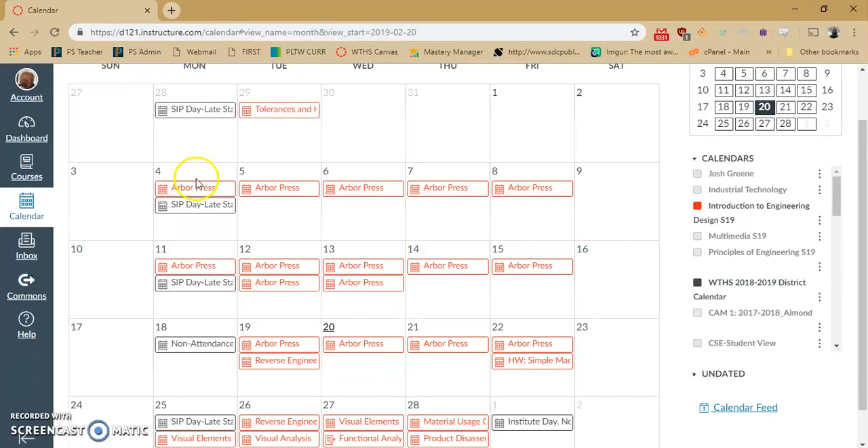The very first thing you want to do is go to the Canvas calendar, and in February there is the Arbor press template that is on the 4th. Click that, download that drawing, and place it into your U drive where you have your folder with your Arbor press.

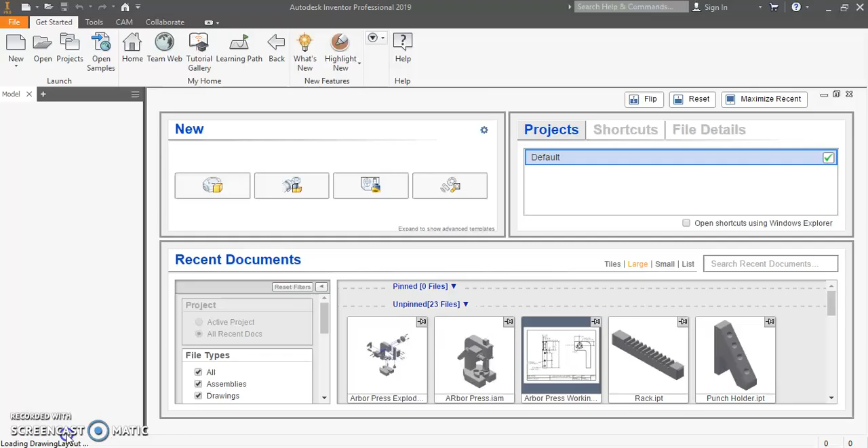Once you've downloaded it, you can open up that document, and it will eventually open in Inventor. If we take a quick look at it, it has name, file name on the left, date, material, scale, volume, and your period.

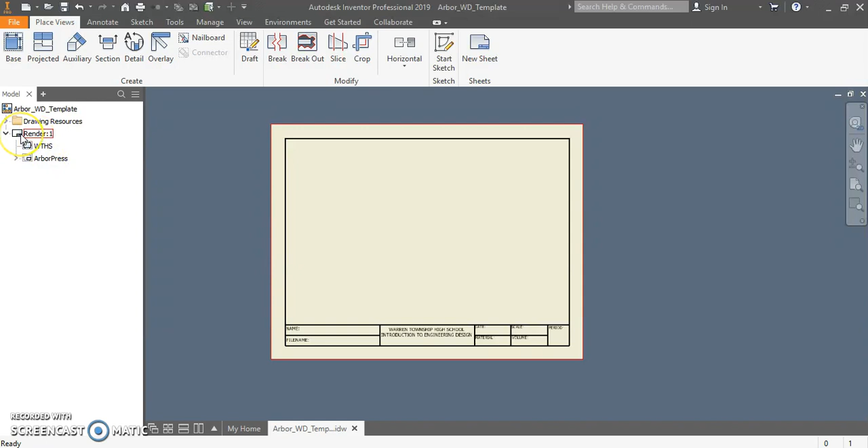Next, we're going to create a bunch of sheets. The first sheet is going to be our rendered view, so I'm going to slow click twice on the name and change that to render. I'm just going to create all my sheets first, so I'll click New Sheet. I'll come back and fill in the period and scale later. Now I'll slow double click on this one, and this is going to be the exploded view.

Create another sheet, again I'm going to put these in later. Because the exploded view is so large, we're going to put a parts list on another page. After the parts list, we are going to have the column. If the slow click isn't working for you, you can always right click and edit the sheet, and change the name there.

So we have column. We are actually going to need 2 columns, so I'm just going to call this column 2. We need 2 for that.

After that, we're going to create another sheet, and this is going to be the gear plate, and the cover plate. This is what we'll start with, our different pictures, and then we're going to start putting things in one by one.

So for the exploded view, again, we've seen how to do this from the automata, but this will be quick. I've gone to the exploded view, I'm going to bring in the base, and I'm going to bring in the exploded view.

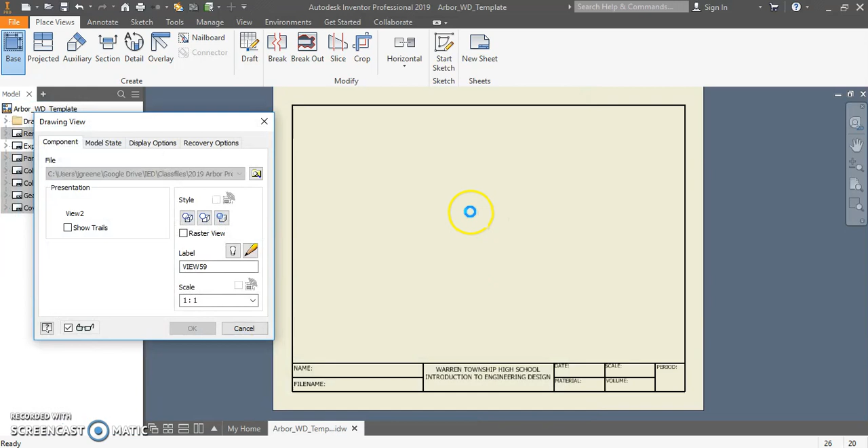And this is the position. I'm following the position from the drawing template, and I'm just going to change the scale here till I get something that I think is appropriately sized.

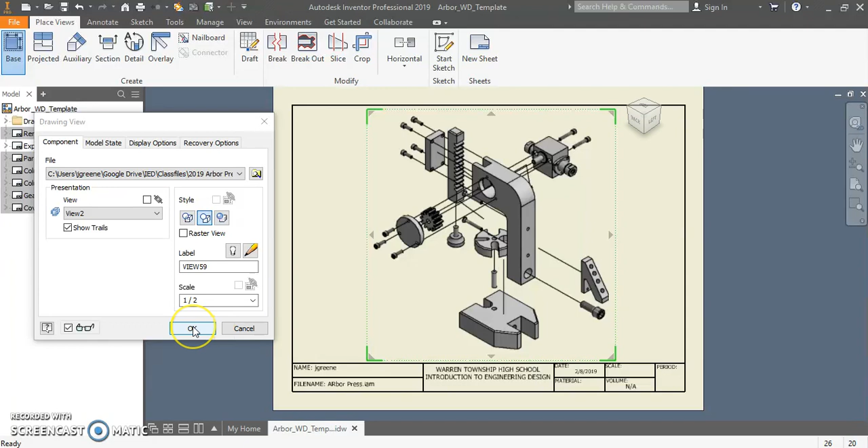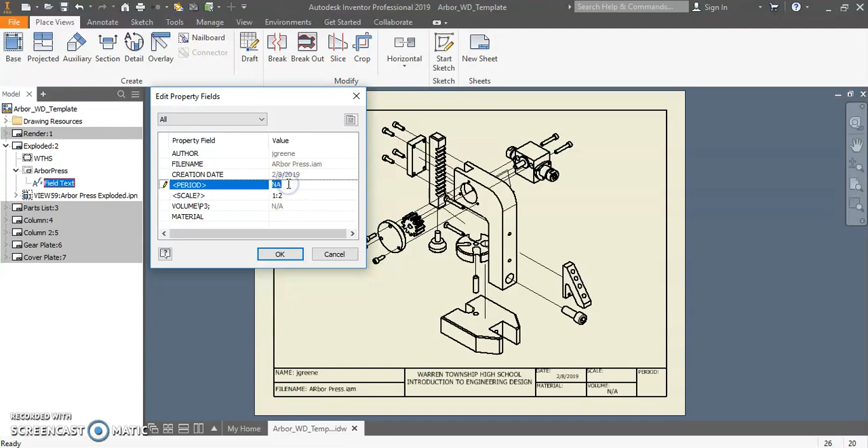Okay, it was 1 to 2, so now I can go in and edit the field text. The scale is going to be 1 to 3, or it's actually 1 to 2, I believe. And the period, that's going to be your period you're in, and this one's not going to have a material show up because there's a couple different pieces of material here.

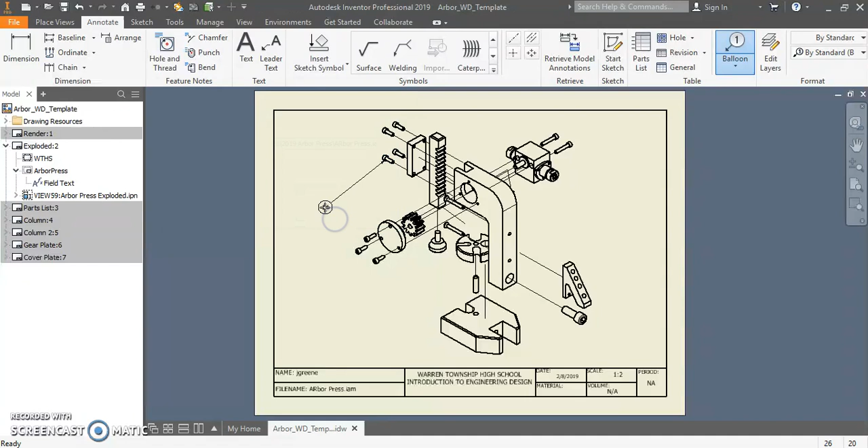You're going to go through and balloon this all out. Again, the ballooning should look like this under Annotate, Balloon, and the first time you select something, it's just going to make sure you have the correct BOM structure, and then you're going to put in your balloons. So for item 14, I only need to do it once because there's a bunch of these socket head cap screws that are all the same. Again, just go through and balloon each one out. I won't go through that right now.

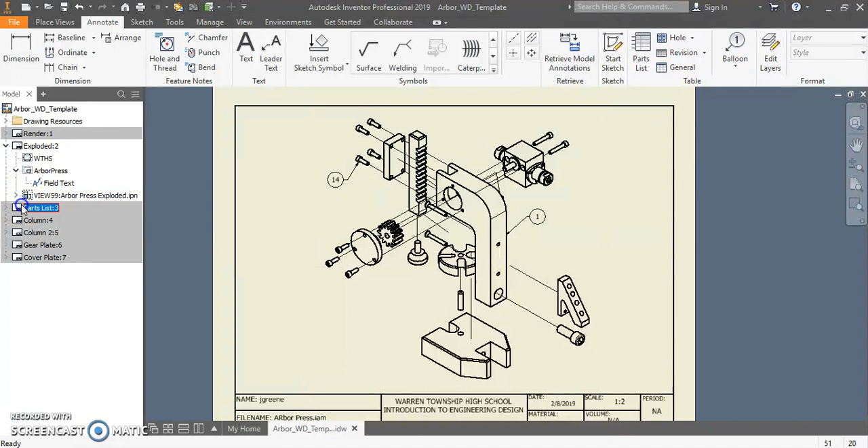Under parts lists, we're going to create a parts list, and it says select document. Well, I can't select a view because I don't see anything, so instead I'm going to select that exploded view, and I'm going to hit OK, and put that right in the middle of the page, and make some changes to it.

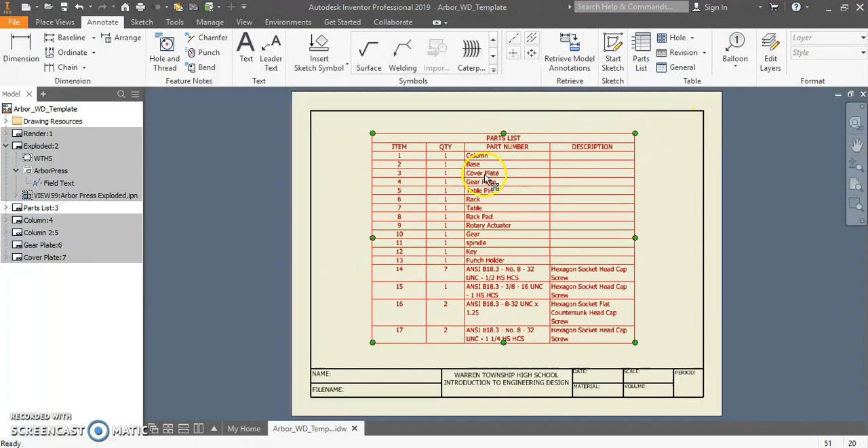So I'm going to right click and edit the parts list. I'm going to select column chooser. I'm going to get rid of description, and add in material, and add in volume. I'm going to select OK.

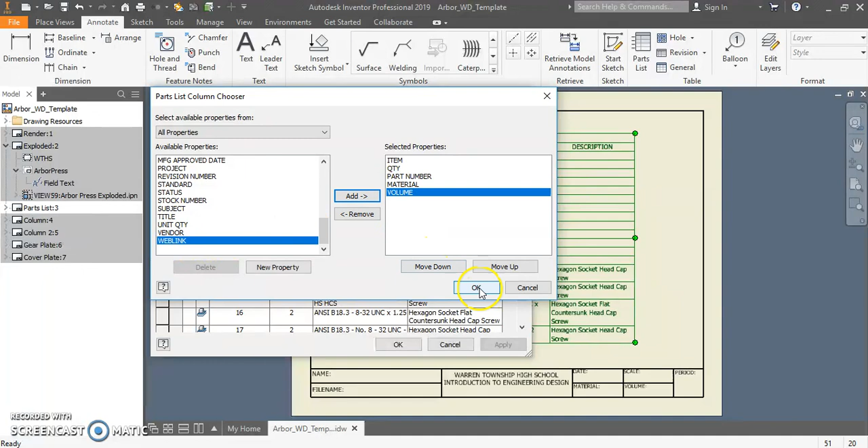Looks through, everything looks good. I'm going to go ahead and hit OK. I'm going to size this now to try to fit my page as best as I can.

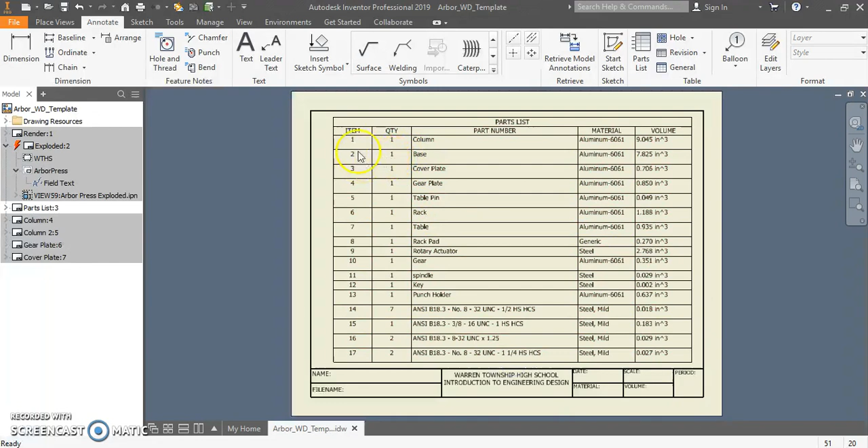The item and quantity can actually be pretty small, and then I can use that to continue resizing what I have. It takes a little bit of effort, but if you just move the item quantity over and make it bigger, then everything should fit.

This is a good way to check right now as I go through this. You can see that the rack pad is currently a generic material, so that's something I'll have to go back and change. You want to make sure it's aluminum or steel based on the drawing.

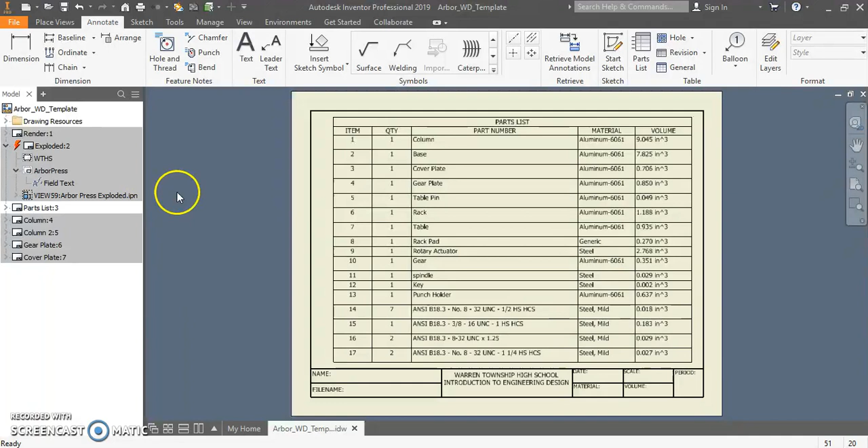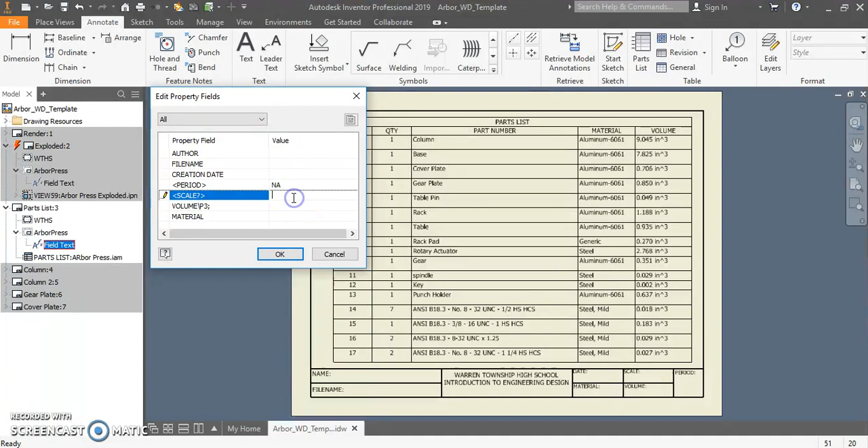Now for the parts list, I can also edit the field text, and the period again will be your period. There is no scale on this, and everything else is just brought in. If we have time, we might get to this. Alright, moving on.

The one thing we haven't done yet is the render, but there are videos on that. Let's go to the column.

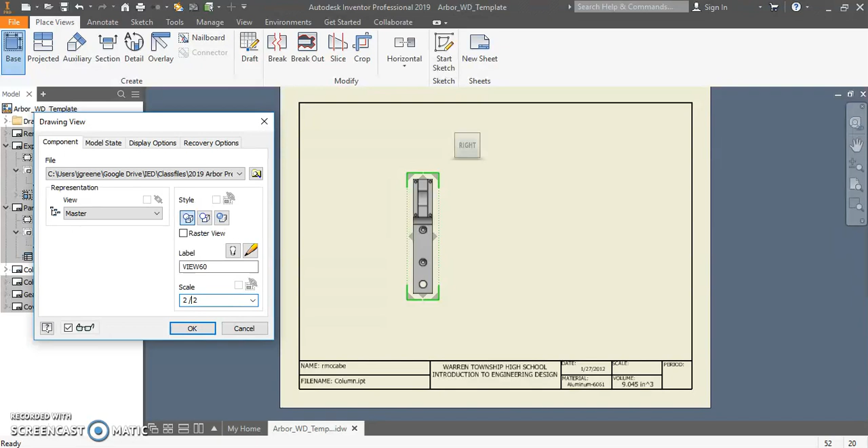For the column, we're going to set it up in 2 pages that we want to see. So our first one for the column is going to be this view. And for the scale, what I found fits is going to be a 2:3 scale.

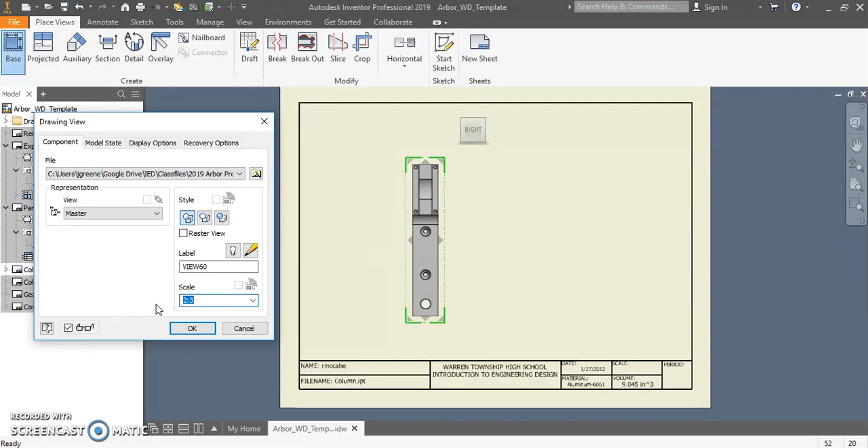You might be able to get away with something else. Let's see what 1:1 looks like. Yeah, 1:1's a bit too big. So 2:3. We can even try a 4:5 — actually that isn't bad. So we might go with that.

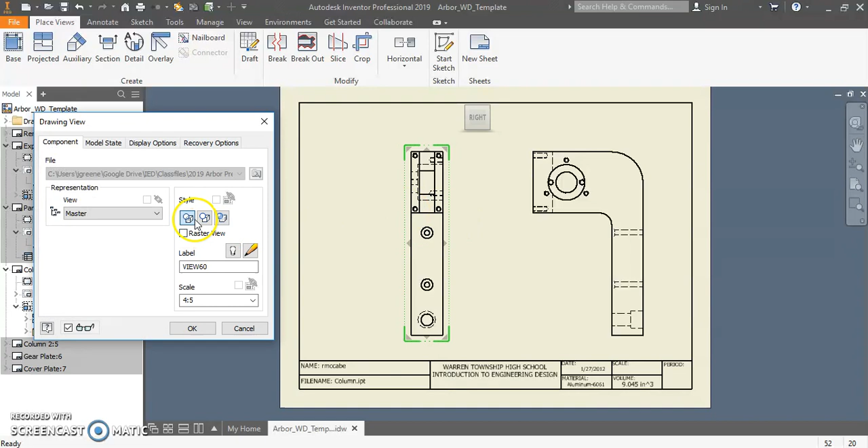And then you're going to put in the right side view, looks like that. I'm going to double click on this view, and I do not want to see hidden lines. So those are the 2 views for the column that we're going to use on the front side.

This is going to be used to dimension all of our holes out. Additionally, I'm going to make this a little bit wider, because trying to dimension where all these front holes are and where they are in relationship to each other, I'm going to create a detail view.

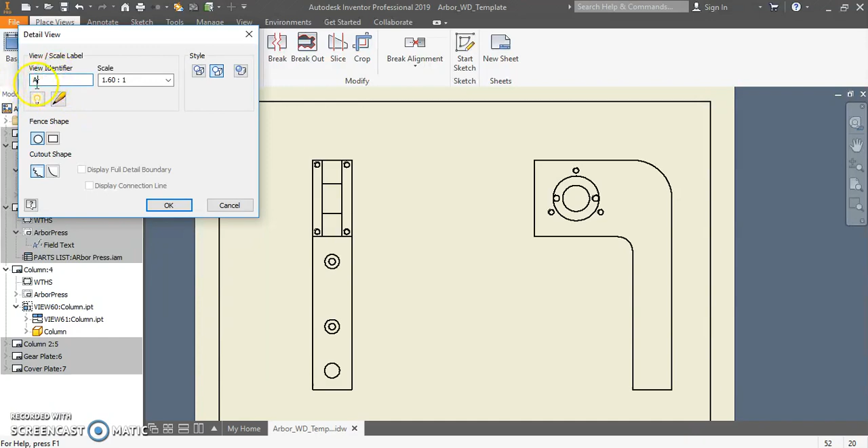Once I select that detail view, I'll click on the front face. I can start the view identifier as an A right now. And then I'm going to take my fence shape — I'll leave it as circular, that's fine — and go right in the center of this face and just drag out a view. Make sure the A is kind of off to the side.

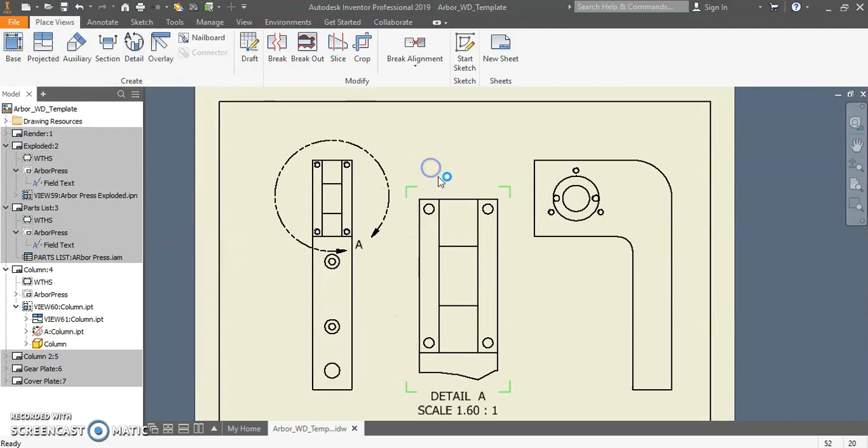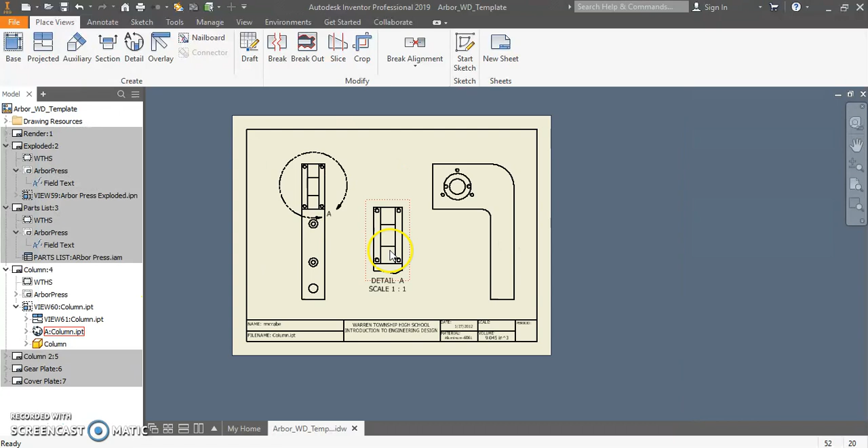You might need to reposition that later. I'll click here in the middle, and specifically this is a bit too large of a scale, so I might want to come back and edit this view to change the scale. 1.6 is a little big, so 1:1's not bad.

Now what I can do here is set up my center points and do a better job of dimensioning edges and whatnot. Again, follow your dimensioning guidelines, making sure you're getting all your commands in. For the next column...

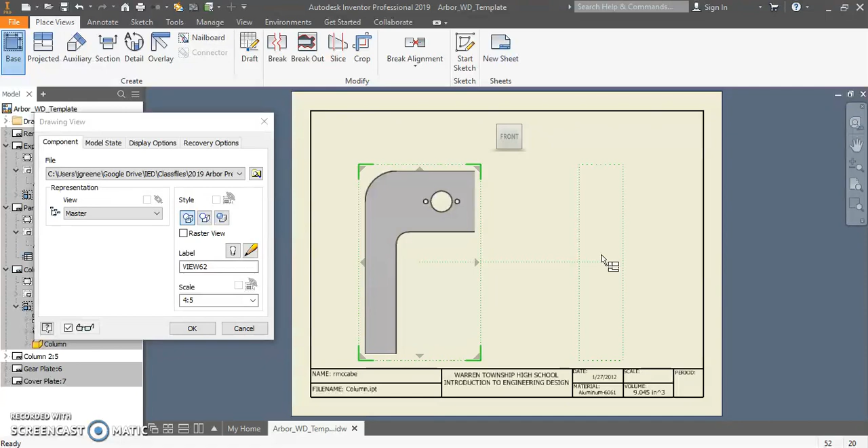We will go from the left side, so we want to be able to see these back holes. Again, I'll do this 4:5. And then I want to see the front, and then I'll bring up a top view.

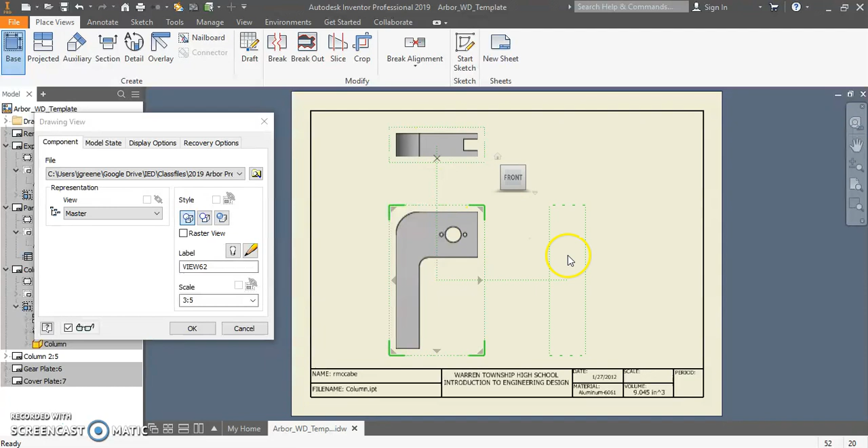Now for this one, the 4:5 I'm seeing is actually a little big, so I'll go back to 3:5. I'm going to go straight up, straight over, and it's going to be more of a traditional multi-view. I'll go ahead and turn the hidden lines off so I just see the holes. What this does is it gives me an area to dimension how far that front slot goes back in.

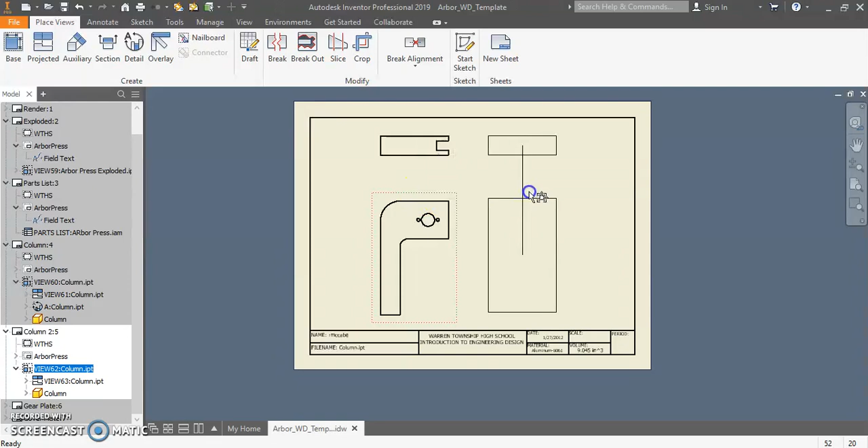For this, I'm actually going to delete this view — I don't want that. I'm going to move this over, and I actually want to see the back. I got one hole in the back that I need to see, so I'm going to delete the view, select projected on this face, and move it to the left. Now I have that hole for that very large 3/8 cap screw that I can see in the back.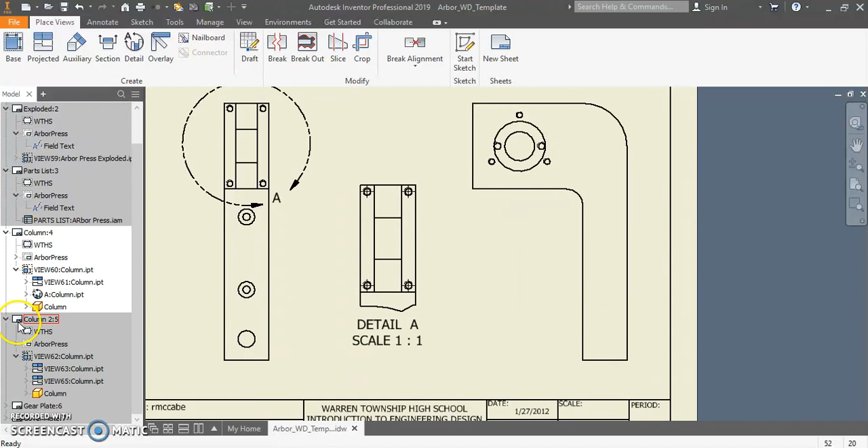So I do have 2 drawings, looking good. Next, the gear plate and the cover plate. There are examples of those up at the front of the classroom.

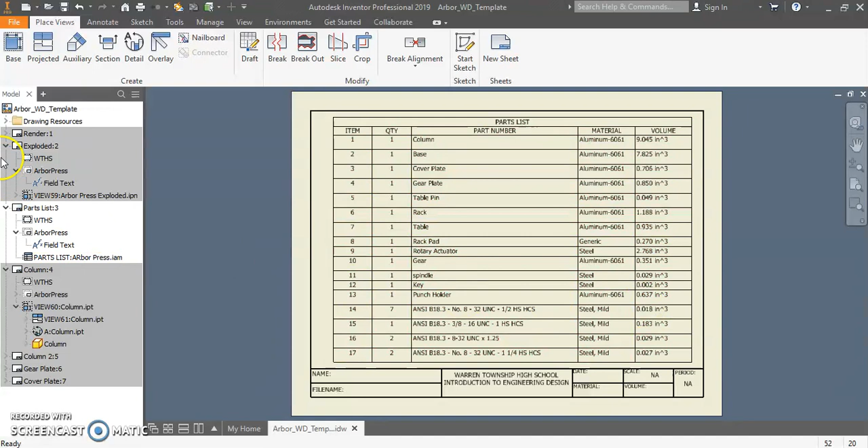Please take a look at those, but this is how we're generally setting up with everything. Some notes in the parts list, you can see the volumes. Double check to make sure they are displaying correctly and that you do have the correct volumes for what you've been working on.

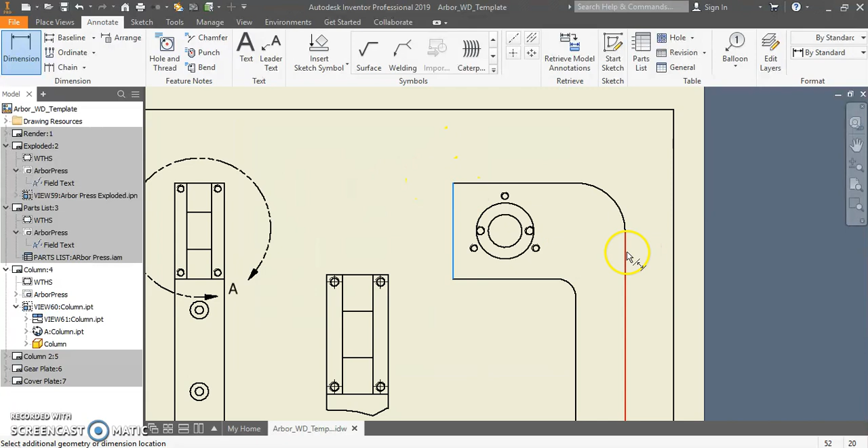Next, we're going to do one more thing to get things set up. We're going to actually edit the dimension styles of a few different pieces so things look a little bit better as you're working with them. To do that, the quickest way is I'm just going to throw in a dimension, right click, and edit the dimension style.

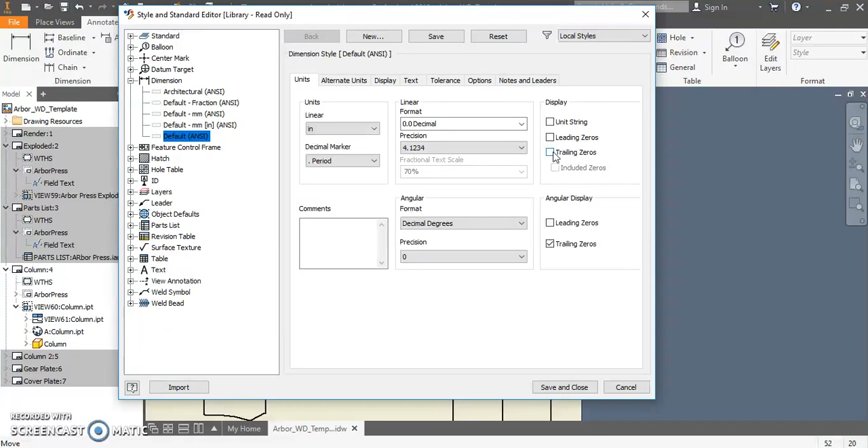Inside edit dimension style, I'm going to change the precision under units. Right now it's only showing to the 2nd decimal place, I'm going to go to the 4th. Then under display, I'm going to get rid of trailing zeros, so if something is 3 inches, it won't display 3.000 - I don't want those trailing zeros, so I'm going to get rid of those. I'll save and close, and you can see 3.5 is shown there - and that's what we want.

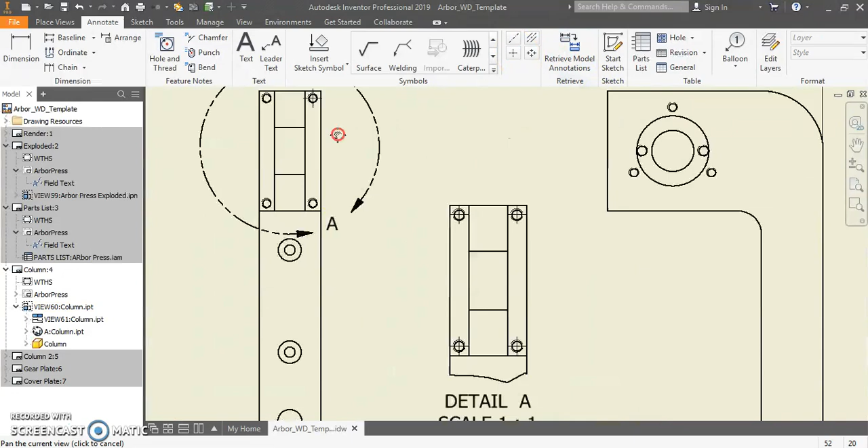Next, for our hole notes, we used holes for most of this, and hopefully you used holes and not extruded circles. But there is a hole and thread note feature.

So again, I wanted to show you this as you're working on it. If you select hole and thread note and click on the hole, you can see it will actually bring the thread note out for you. So this is an 8-32 hole, and it's a UNC classification 2B. We don't need the classification necessarily.

So what you're going to do is edit when you place hole notes here - I'm going to show you how to do that. Hit escape so you're not in the hole and thread note tool, then just double click, and right here where it says THDCD, you can highlight that and delete it, and instead put a quantity note. Go ahead and hit OK, and you'll now see there are 8-32 UNC, and there are 4 of them.

One thing we do not have here is the depth of our hole. So in front of the quantity note, I want to bring in how far those holes go down. What I need to do first is insert a symbol - the depth symbol - and then I'm going to actually bring in the depth. So these are the values, they look like the symbols, but these are the values.

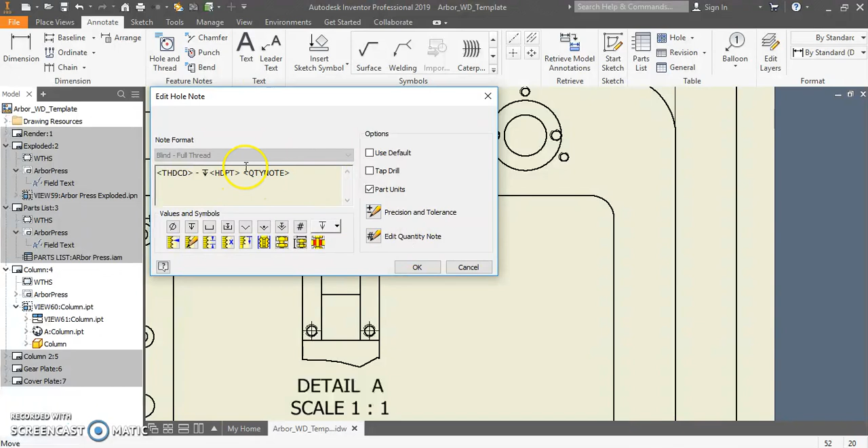So when I click here, bring in the depth symbol, then actually select hole depth value, and I want to make sure there's at least a space between those two in the quantity note. So I can hit OK, and you can see there that it's 8-32, goes deep 0.438, and there are 4 of them.

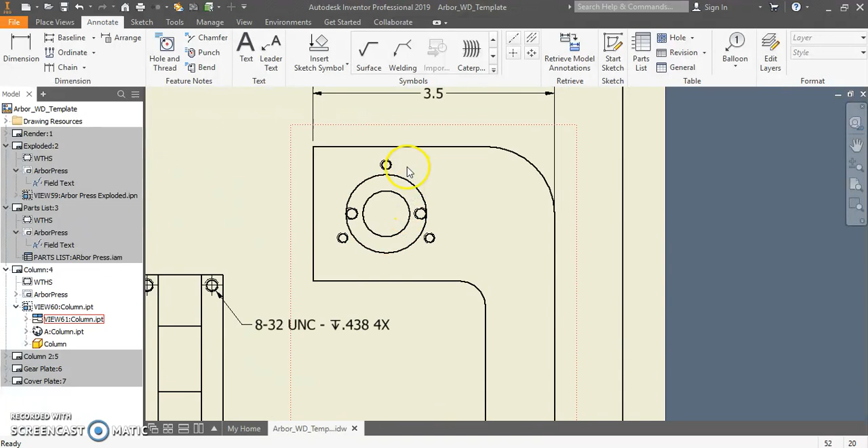So again, that's a hole note for those 4 holes, and you can use that same idea for the other ones. Last thing I'll show is some of these holes are on circular patterns, for example these.

To do that, what we can do is select the centered pattern and say okay, these are on a pattern. I would select the center of a pattern or something that shares the center, and then select the holes, and as you see going around, it starts to create that center mark.

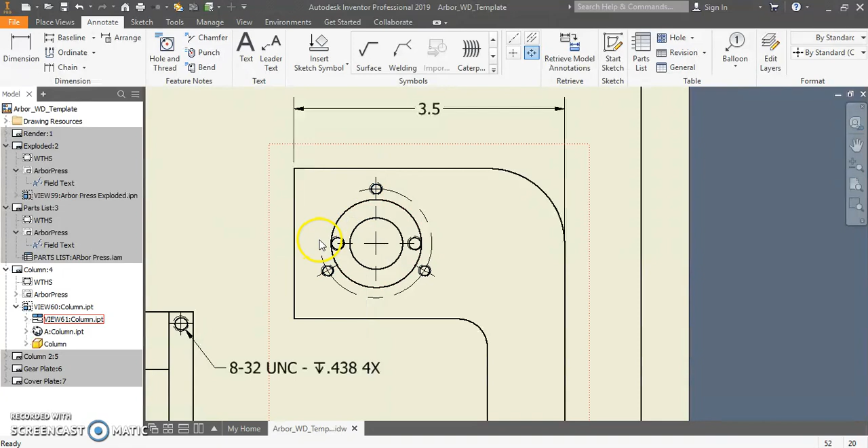I'm going to right click and create, and then if you want you can drag that closer, and now you have that center line in which you can dimension the diameter, or dimension the radius too. So again, that center line for diameter - like you drew out the circle and dimensioned it, you know where the center of the holes are. And there are 5 of them.

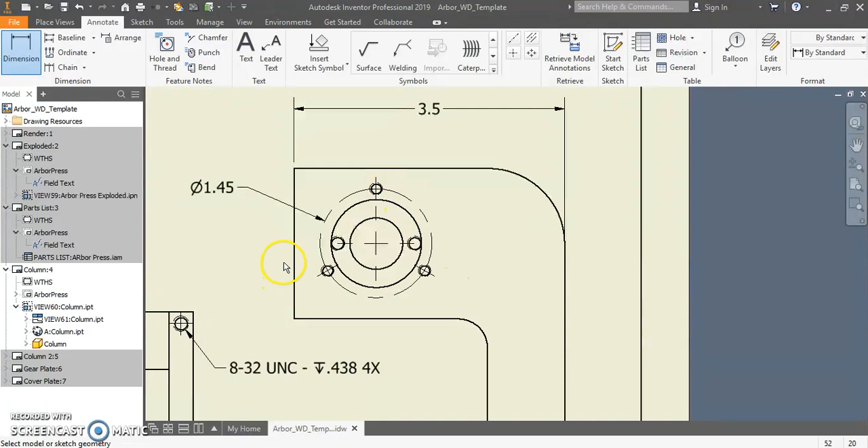There you go, so that's kind of a video to help you get set up, get you moving, make sure as you're going through you're putting in your scale, your volume, your material, anything that you've seen missing.